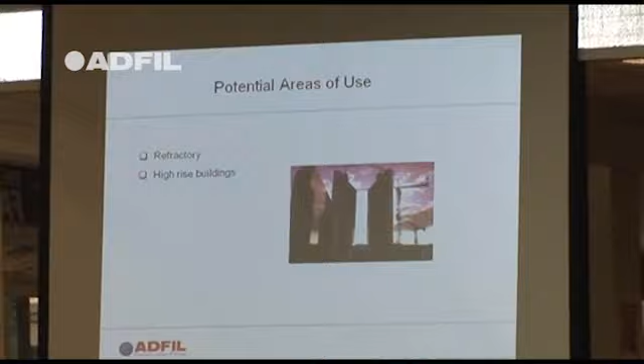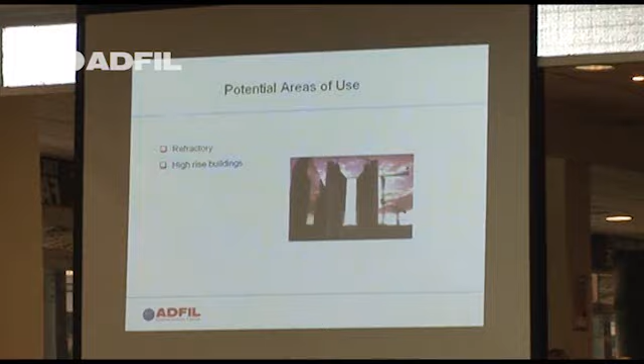Other chemical companies on some high-rise buildings in London incorporate polypropylene fibres, also with Bardon Concrete, or Aggregate Industries as they're known, London Concrete. They've done lots of buildings in London, incorporating polypropylene fibres solely to reduce the risk of explosive spalling in high-rise buildings.

Bridges - in some countries they define a tunnel as: if you've got a road passing underneath a bridge, it constitutes a tunnel, so they have to protect that from the risk of explosive spalling. In case a petrol tanker gets stuck under the bridge and explodes, that bridge would no longer be serviceable.

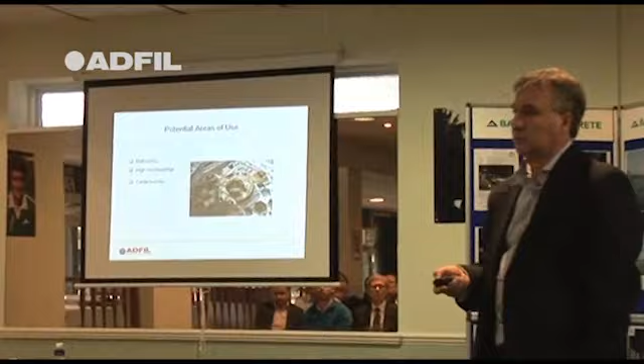Cable tunnels - every cable tunnel in the UK contains polypropylene fibres. There's miles and miles of cable tunnels laid every year, hundreds of thousands of cubic metres of concrete, all containing polypropylene fibres, and that's to reduce the risk of damage.

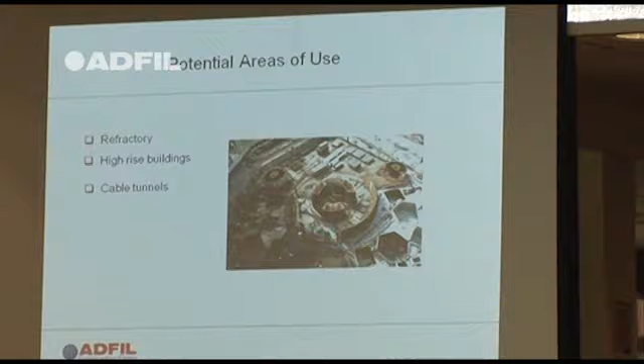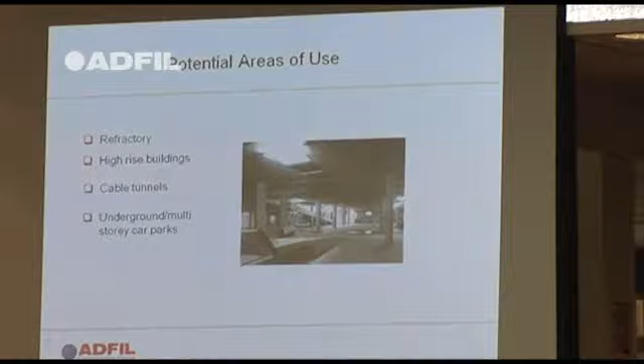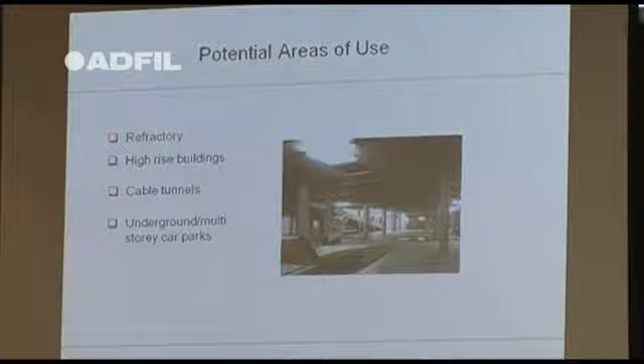Underground and multi-storey car parks as well. Across Europe, where you've got underground parking, a car goes up in flames, your column loses its strength, you get explosive spalling, the steel starts to melt and weaken at about 700 degrees centigrade, and you get structural failure. So in a lot of areas across Europe and the world, microfibres are being used for this - this is the main purpose now. In the past it was durability, freeze-thaw, plastic shrinkage cracking.

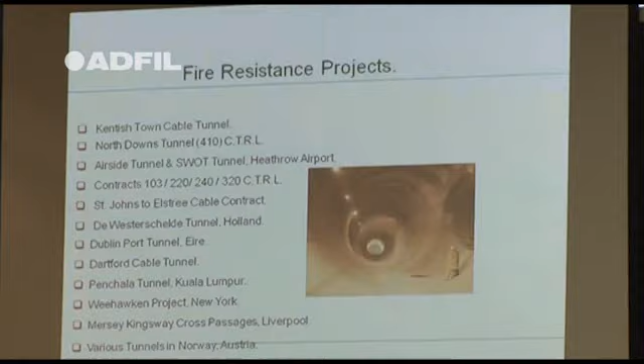Some of the jobs we've been involved in - it's just a list, you can see they're all over the place. Norway, Kuala Lumpur, Westerschelde Tunnel in Holland, Airside Tunnel at Heathrow Airport, Kentish Town Cable Tunnels, the Crossrail project in London - all the new tunnels, costing £15 billion at the minute. That's all got microfibres in it.

They've also got - what I'm going to talk about next - macrofibres in some of the sections.

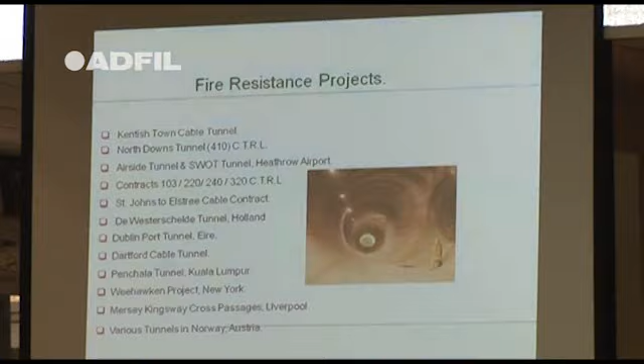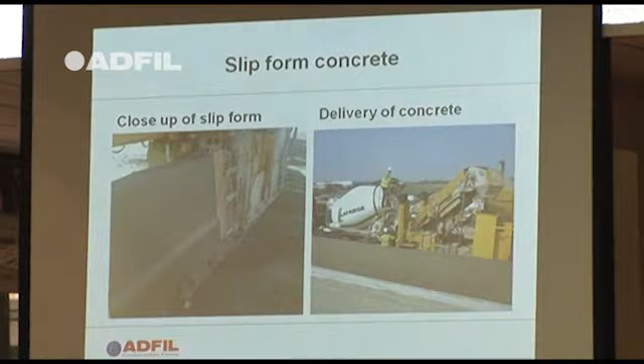Other areas of use of the microfibres: Britpave in about 2000 specified the use of microfibres for all extruded barriers. So all the barriers you see on the motorways - the M5, M6, M1, M25 - hundreds and hundreds of miles of these being done over the last 5 years, they've all got microfibres in, and it's there for durability and longevity of those structures.

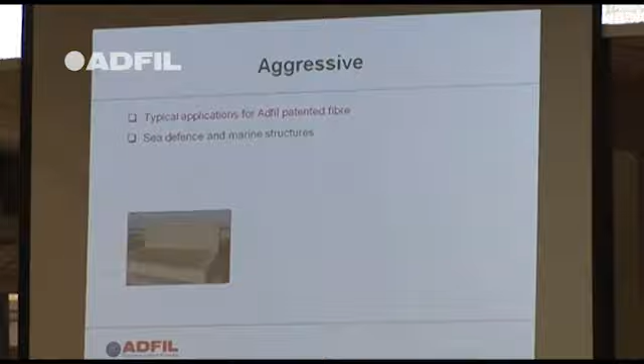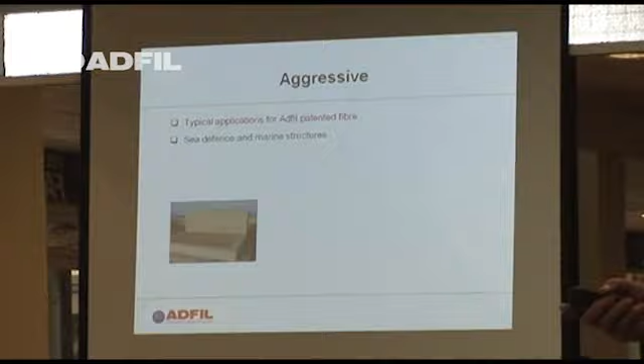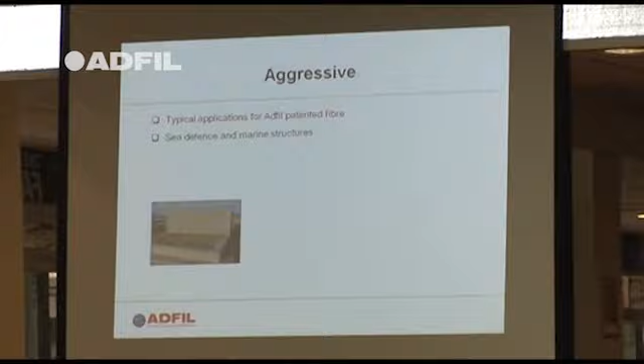Aggressive environments - typical areas, sea defence and marine structures. Everybody knows Grace have done a very good job promoting how well they did at Blackpool Sea Defence. They put macrofibres in the concrete to replace all the steel reinforcement. It also had microfibres in it for durability purposes. So on that project you've got a combination of macrofibres and microfibres. It's also possible to combine steel fibres, steel mesh, with micro and monofilament microfibres.

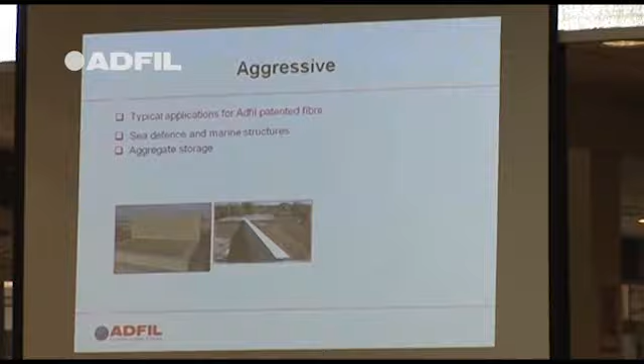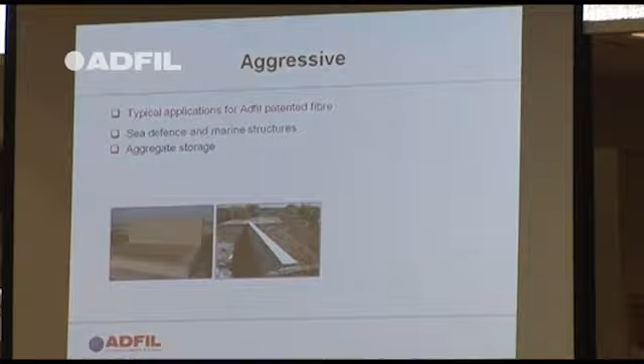Aggregate storage areas - lots and lots of concrete companies all over the country. When I was at Tarmac, we'd always use microfibres in the concrete because it increased abrasion resistance and longevity of the concrete. And as shown earlier, the new plant in Plymouth also contained microfibres for the same benefits.

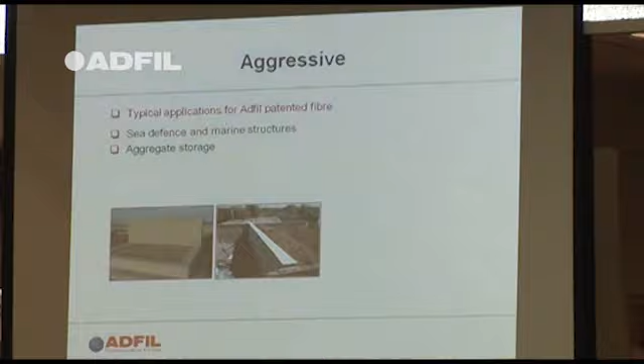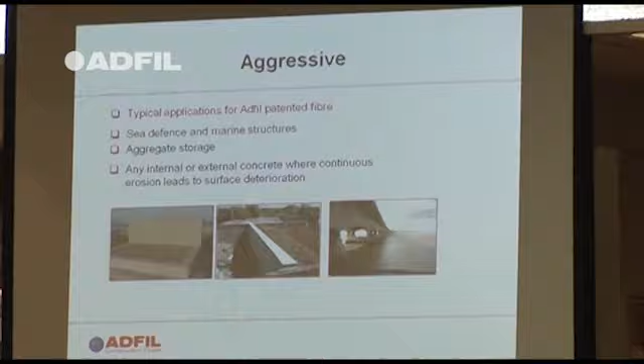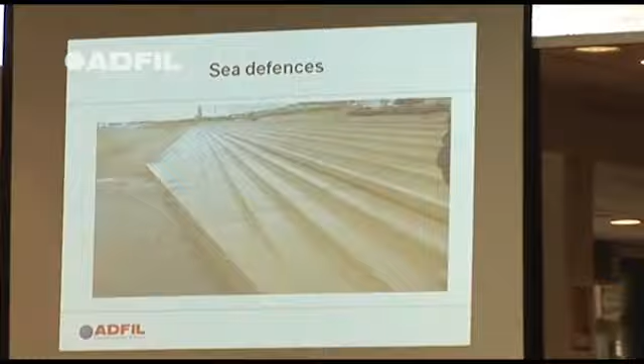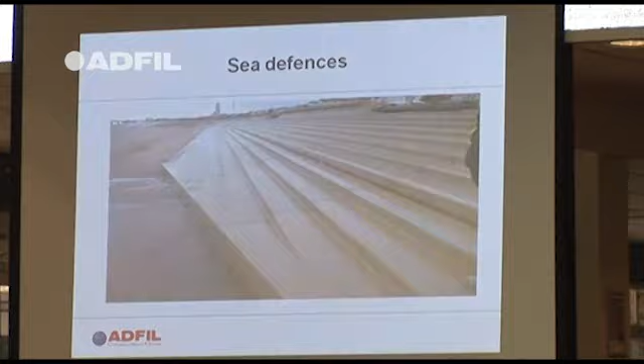Areas of continuous erosion - you've probably all heard of Birse Coastal. They do big sea defence projects all over the country, and as standard incorporate a microfibre in their mixed concrete formulations. They also use a macrofibre where feasible. That's the Blackpool Sea Defence - miles and miles, I think there were 300,000 cubic metres of concrete, no steel in that whatsoever, just a combination of micro and macro fibres. That model has been replicated all over Europe.

Another big area - external concrete slabs. Reduce the risk of plastic shrinkage cracking, increase abrasion, increase impact resistance, added freeze-thaw benefits. You can use this product in conjunction with air-entrained concrete, or air-entrained concrete by itself - just depends which method you want to choose.

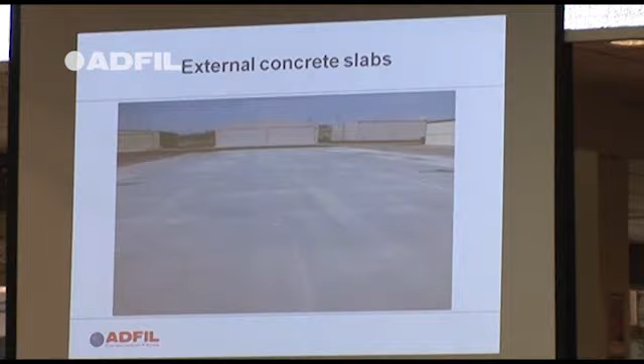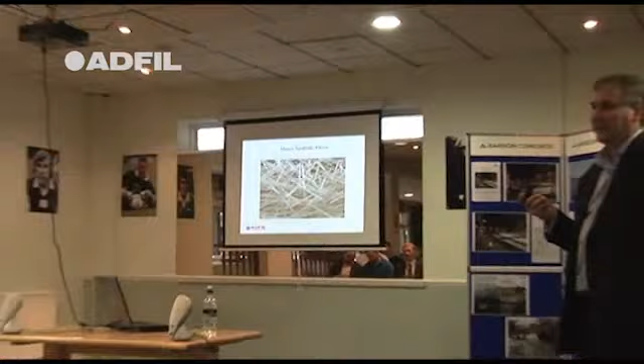I'm now going to touch on macrofibres. Macrofibres have been with us probably for the last 10 years on a very small scale. Since about 2003 it's increased exponentially - there's now in the region of 50 million cubic metres of concrete per year using macro-synthetic fibres globally.

It's used in anything from precast factories, ready-mix concrete for external and internal slabs, walls, precast systems - you name it. If it's possible to use it, we can do a design. And David, at the back, who'll be talking next, is our engineer - he designs the use of our fibres into systems, so if you use it, it's PI'd, it's warranted.

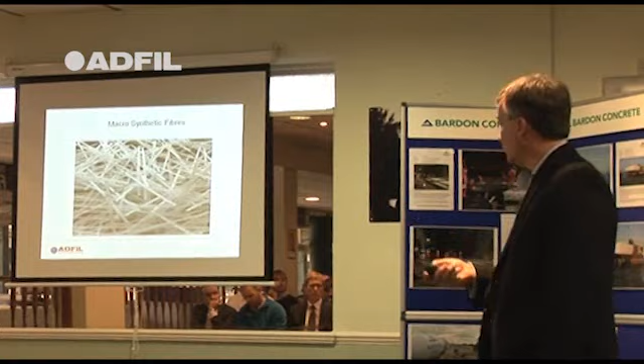You should also be looking for a CE mark for these particular types of fibres. It's a guarantee of consistent quality. They might be consistently rubbish, and some products are.

The ones that we do, and I think Ian will tell you, we've developed a new fibre, Durus S400. It's easy to mix, which is good for the ready-mix people, you don't get balling. It's easy to finish, it's good for the contractor. And from an engineering perspective, it's good because you haven't got to design using 2, 3, 4 layers of mesh, which then make it impossible for the contractor to use, and it increases the cost to the end user.

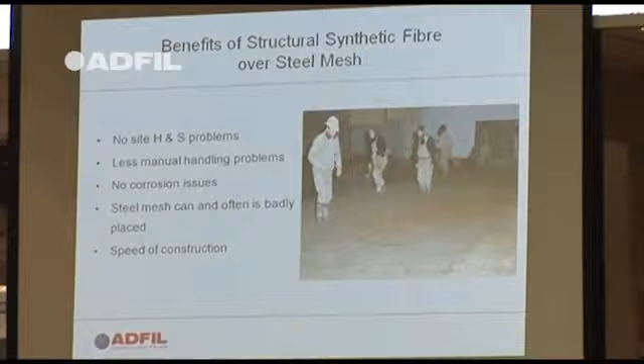Ian touched on this earlier, I'm not going to spend much time on it. No site health and safety problems.

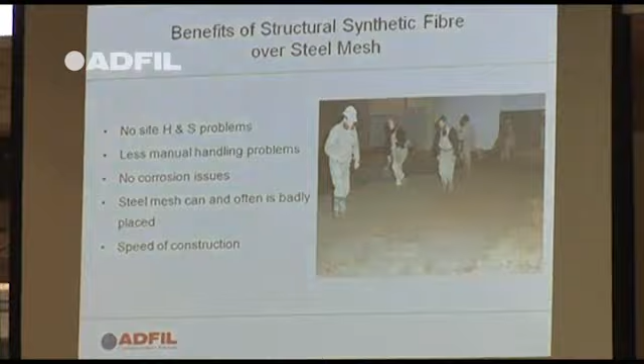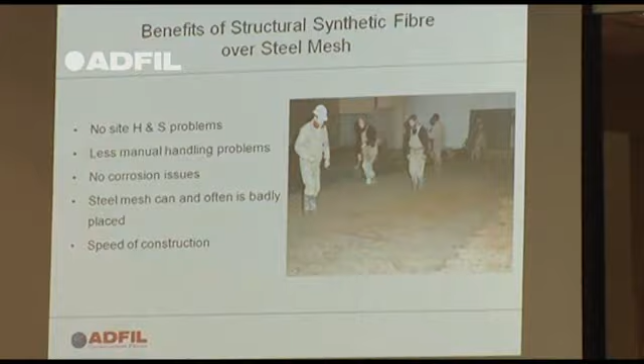We did a large job with Snowdon flooring back in October 2010, and it finished in... I lost track of my years, that's all. As you get older, you do.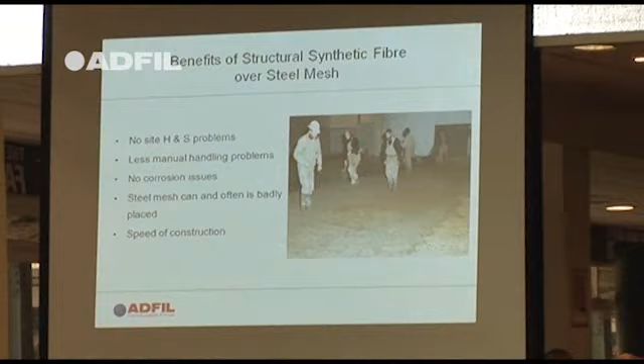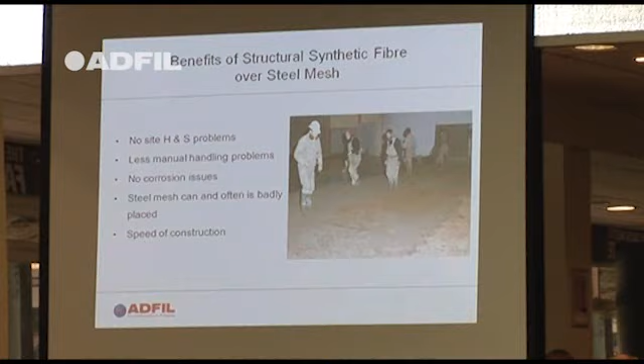And basically, it saved them 1 month on their programme time. It was a multi-storey car park covering 25,000 square metres. This was done in conjunction with Bardon Concrete, so Bardon supplied the concrete, Snowdon Flooring laid the floor, and they didn't have to add any mesh. The specification was a 70mm concrete screed on top of concrete planks.

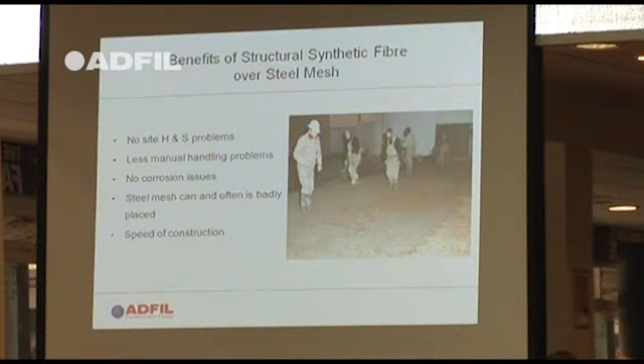70mm on top of concrete planks, it was 25,000 square metres, and it saved them 1 month on the programme time. So they opened the car park early, and the NCP were very happy because they could take money earlier.

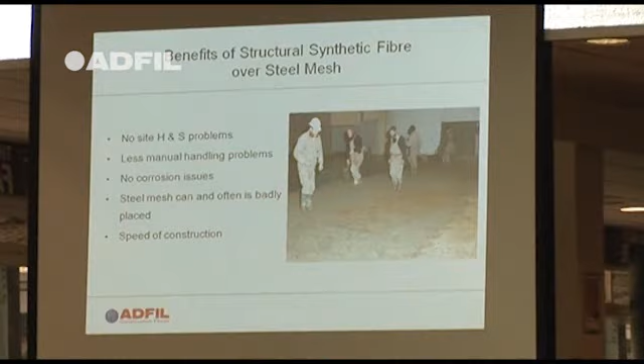Less manual handling. Everybody, every company has problems with manual handling. Lifting boxes, lifting mesh, lifting briefcases out of the backs of cars. The more lifting people do, the more chance they've got of hurting themselves.

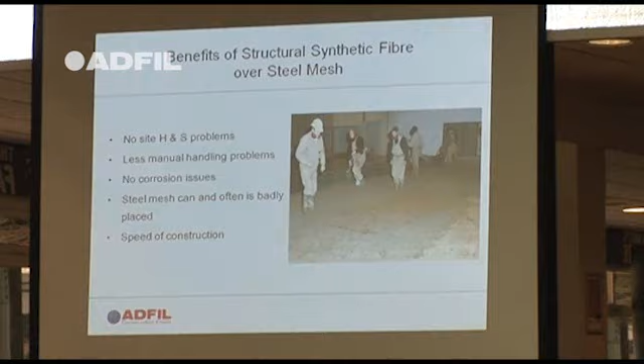Also, steel mesh can and often is badly placed. As a concrete technologist, when I worked for Tarmac, every week I'd go out on a problem, plastic shrinkage cracking. What's caused that? Well, why don't you put some fibres in it? That'll solve that problem. Good.

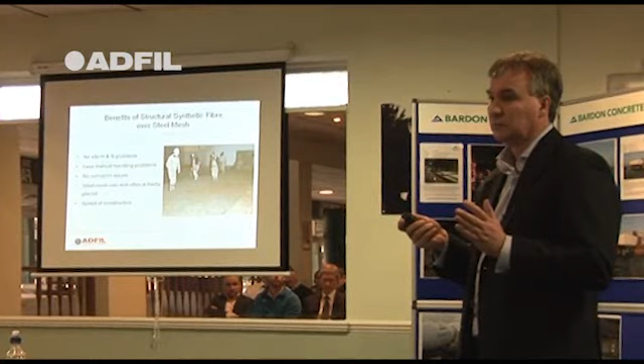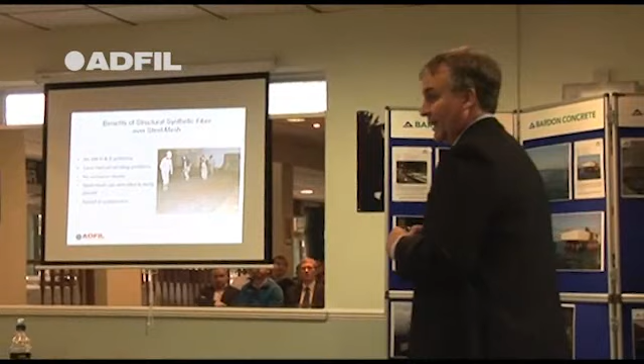Misplaced mesh. Everybody knows about a job where some fibres have been used and it goes wrong. Nobody talks about where the mesh has been used and it's gone wrong. And the problem is, it's both the same problem. It's either been badly designed or the materials have been badly used, so they've used it in the wrong location or the wrong way.

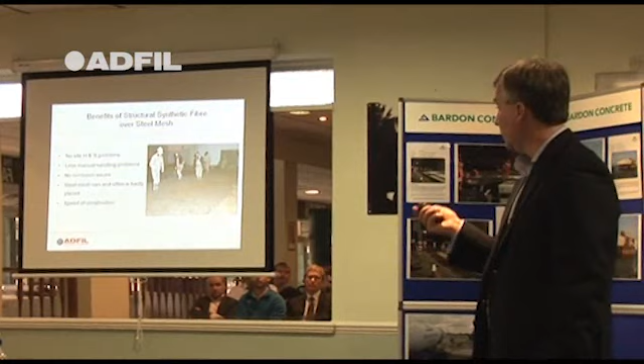It also shows you from Ian's videos, which were really good, speed of construction. If you can construct a slab twice as quick with half the people, it's more cost effective, so it gives your company, if you're a floor layer, an advantage.

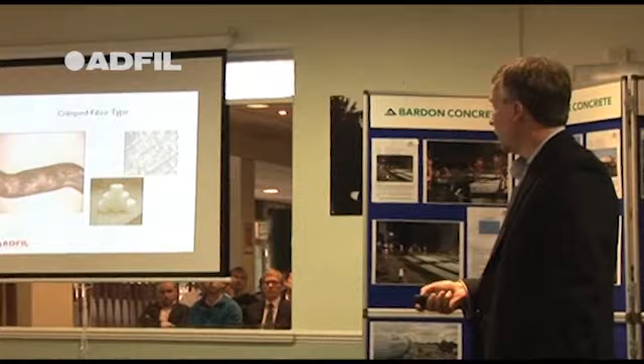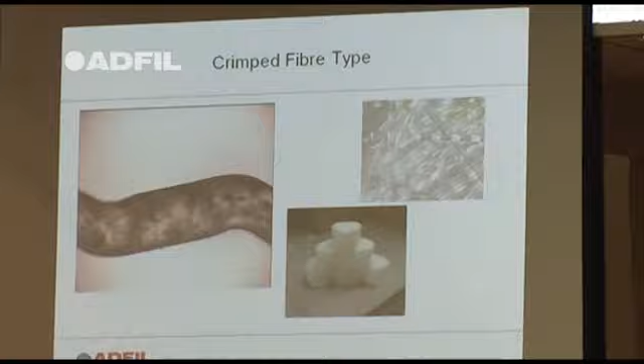There are different types of macro fibre, and very often we get rung up and told, well, we're not using macro fibres, they're rubbish. We've got bits of fibre stuck at the surface, we can't finish it. And it's true, there are different types of macro fibre. We do all three, so you can have any one of them, and I can tell you the ones that lay better and are easier to use.

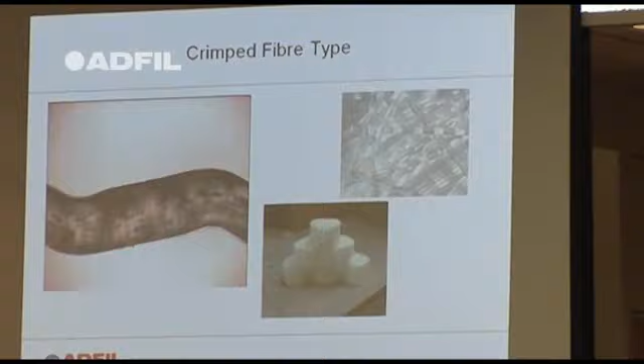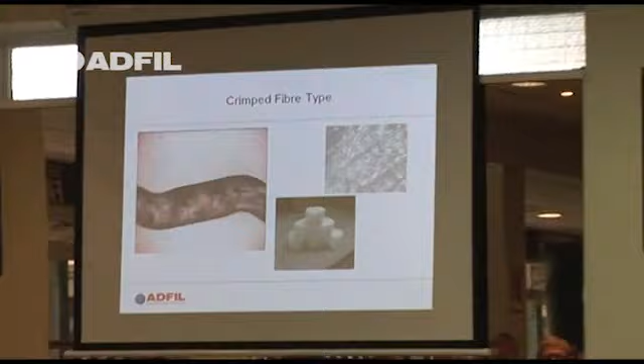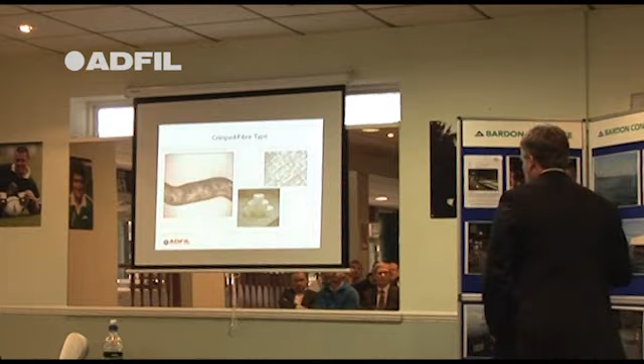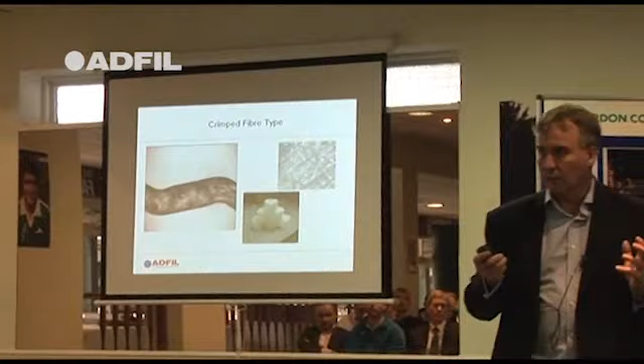There's the first type, which is called a crimped sinusoidal wavelength macro fibre. These are typically 40 to 50 millimetres long, not diameter, and about 1 millimetre in diameter. They typically come in pucks, called fibre pucks, named after sort of hockey pucks. Nice and small, they weigh about 200 to 250 grams each. We put them in pucks because it makes it easier to transport.

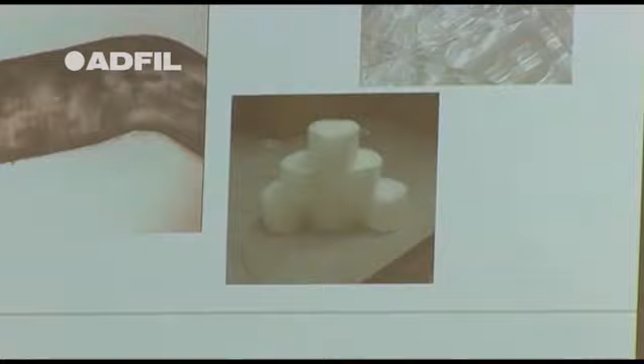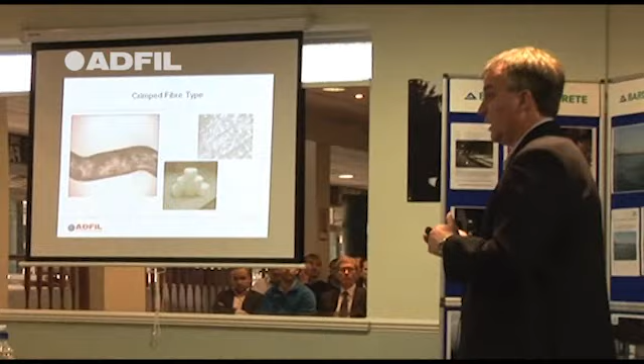So the idea with these fibres, going back to what Ian was saying about sustainable development, is on one truck you can get 22 pallets with 22 tonnes on a truck. The equation is simply 1 kilo of macro fibres to probably 4 kilograms of steel fibres. So if you've got a contract where you're needing 100,000 cubic metres of concrete, you can probably have 4 trucks of this delivered compared to something like 20 trucks of steel fibre. So the saving in terms of energy and the green credentials are enormous.

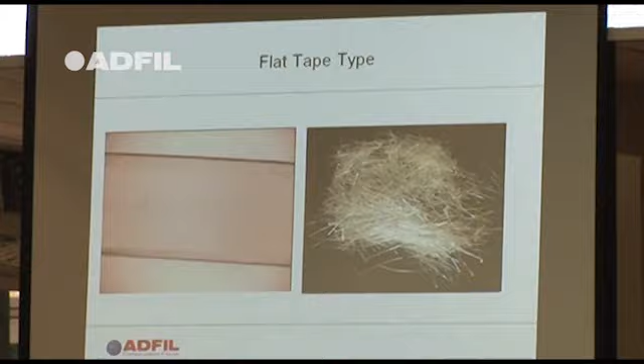The next type of product is called a flat sheet tape. Basically we do one called S200, Grace Construction Chemicals do one called Grace Strux, Propex, another one of our competitors, they call it something else, 650S. They're very, very good products. They give very, very good beam tests, good flexural strength, but the downside of that product is it's difficult to mix and it's difficult to finish. So if you want good performance and you're not bothered about the finish, that's the product to use.